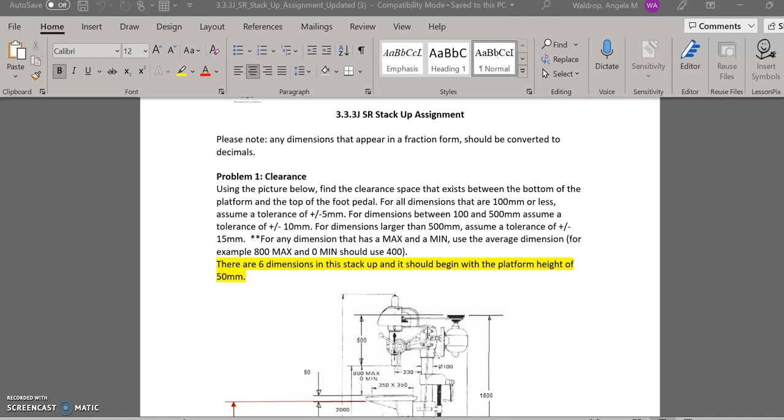Hello, today what we are going to do is we are going to talk a little bit about your stack up assignment. I'm going to try to walk you through the process that you need to follow in order to get this completed. So for the first stack up assignment, or the first part of it, you're going to be doing a clearance stack up for this picture, which is basically a drill press.

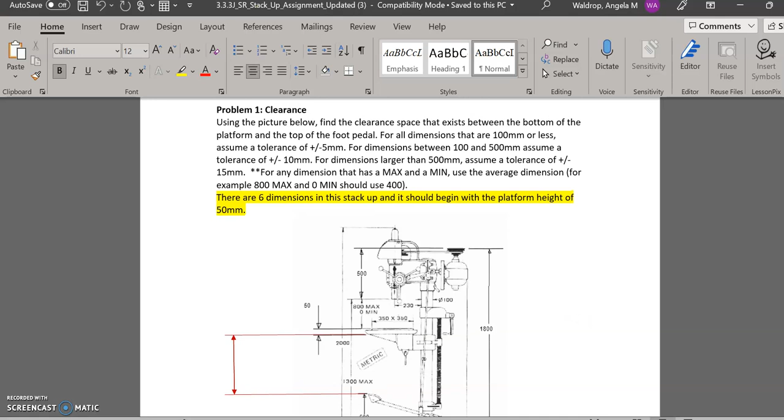And what we are looking for is the clearance space that exists between the bottom of the platform and the top of the foot pedal. And you can see that I did that in this picture with this red dimension here, okay? Now there are 6 dimensions in the stack up, and it should begin with the platform height of 50 millimeters. So basically, I'm looking for this space that's right here.

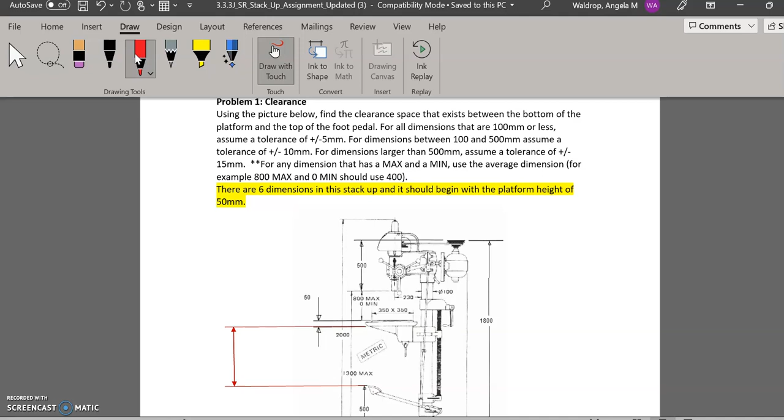I can either start up here on the line or I can start down here on that line. Now, because I've elected to start on the upper line, the first dimension that's going to appear is that 50. So what I'm going to do is I'm going to go ahead and draw my line for my orientation marker. And since I want the clearance below the line, I'm going to use a plus here and a minus there.

Okay. Now, what I like to do when I'm walking through this, and you guys remember that I've done this in class before, is I like to pretend that I'm a tiny ant and I'm walking through the dimensions to get through the components in the assembly. So I'm going to start, and I'm going to use a different color here. That way it's different from the red. I'll use the blue in this case.

So if I'm starting here at this point, and I'm going to the top of the platform, that's my first dimension. And I'm basically going to be traveling eventually back to this red line. So once I'm there at that blue line, the next dimension I see is right here, okay? So if I take a look, there's an 800 max and a 0 min. What I'm going to do is I'm going to just cut that in half and say that that's an average of 400, okay?

Now the next dimension that I have here is shown in the picture. I'm going from this point. And let me erase these other markers here. I'm going from this point here and this marker to up here in this area. And I'm just traveling through the parts. I'm erasing the marks as I go. Now I'm at this level.

I can basically go all the way down to the bottom of the part. So if I put my marker here, I can go all the way down to the bottom of the part here. Okay, that's that next step. And then I'm walking through over to this side of the part because that line goes all the way across here. And I'm eventually going to work my way up to the foot pedal.

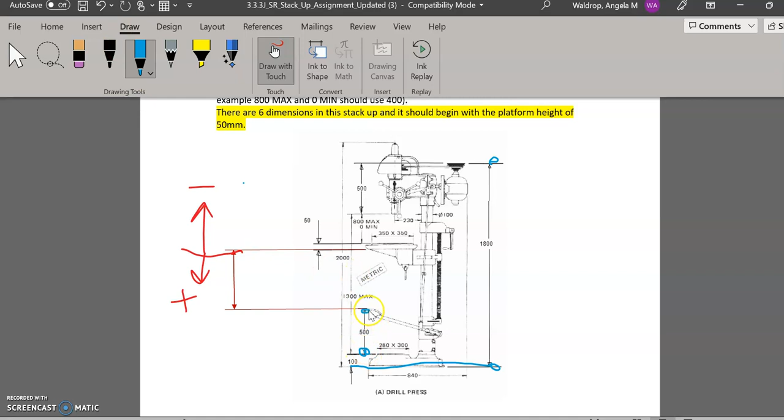So I'm going down from this blue line to this area right here. And then finally, I'm going to end up at the top of my foot pedal where I want to be. So that's the first stack up there.

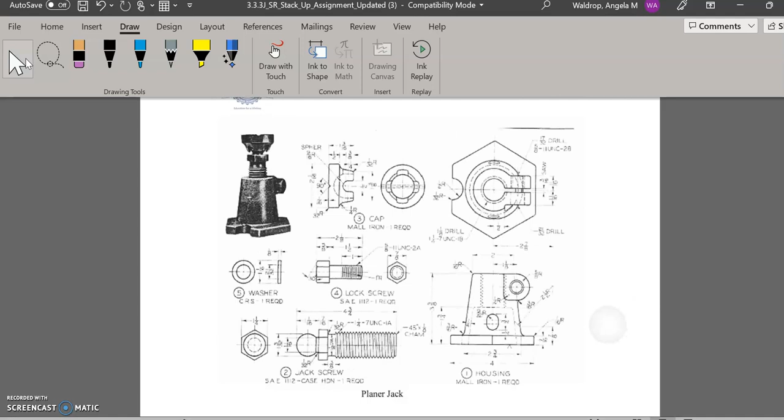Okay, so what we're going to do is we're going to scroll down to the second one. Now the second one is for the planer jack, and those dimensions are located all the way back here on the last page. There's the dimensions for the planer jack. So you'll have to flip back and forth between the picture and the dimensions here, okay? And I've given you information of what to use for tolerances.

So we're going to go back and we're just going to use a picture of the assembly. This is the hand sketch I did to see the clearances that we need. So the second clearance that we need is going to be finding the clearance between the jack screw and the table when the jack screw is fully engaged. When I say the jack screw is fully engaged, that means this screw is as far down as it could possibly go. So you can see that right here, on this level, this line right here, I've got that jack screw, it's down as far as it can go.

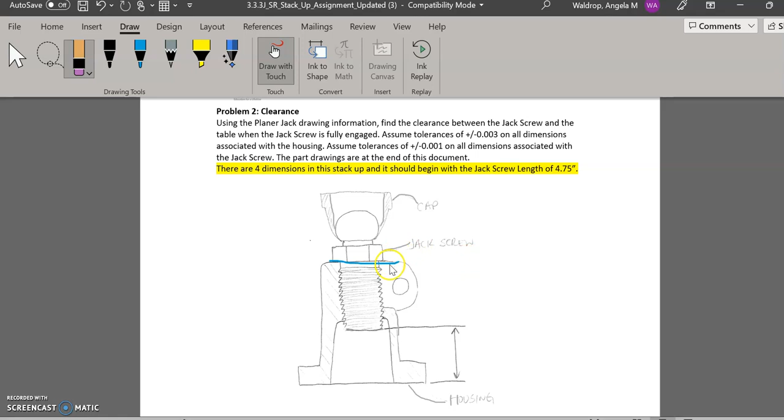So I want to see what kind of clearance I have. That way I know what size material I can put in there. Okay, so there you go. That's stack up number 2, and we're going to start that in just a second.

Okay, so since I am doing this stack up now, what I can do is I can either start at the bottom here where the table is, or I can start here. Now I'm going to go ahead and start here, and I'm going to use my red pen to put my marker here, right here on the line. And then I'm going to make sure that I put my orientation here.

And by the way, if you're having trouble with imagining the orientation, whether it's minus plus or plus minus, you can rotate the paper to the side to be able to get that. So this one arrow pointing down, I want a space here, so that's going to be positive, which means by default that one's negative.

Now if I flip back to my blue pen and go through all my dimensions, the way my dimensions are, I'm going to have to eventually get to this surface on the bottom of the housing. So I'm going to start here first, and I'm going to go the length of my jack screw. That is the first dimension in my stack up, and that's been given to you, the 4.75.

Okay. Now, once I get back to that edge of that ball there, I'm going to eventually have to work my way to this surface. So there's a few dimensions that I'm going to have to work through. I'm going to go from the edge of this ball to probably the ball edge to the hex surface, which basically means here. Okay, so that's the next dimension that I'm going to go through.

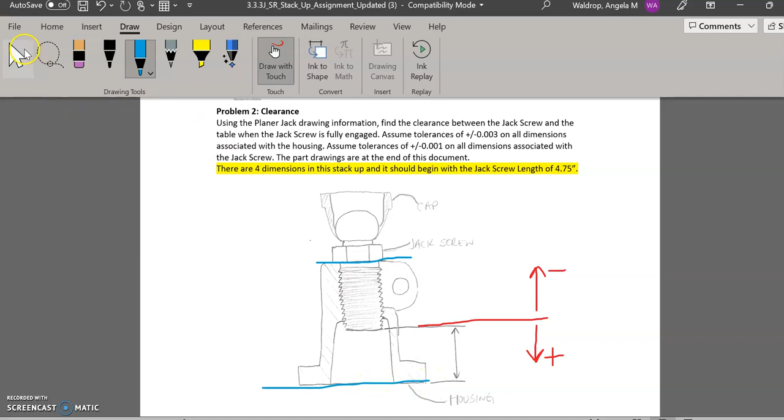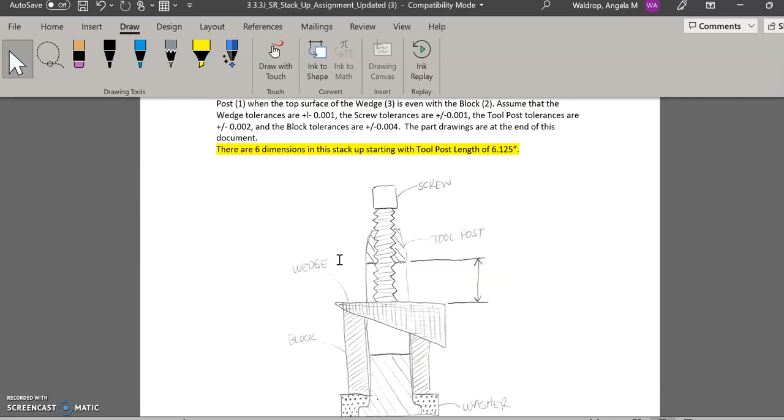Okay, now the next one is going to be an engagement stack up, and this is going to be using the tool post, and the drawings for that are on this page. So you'll have to scroll back and forth between this particular page and the assembly sketch that I've created. Okay. Now what I mean by an engagement stack up is I want to know how much the screw has engaged inside of the tool post.

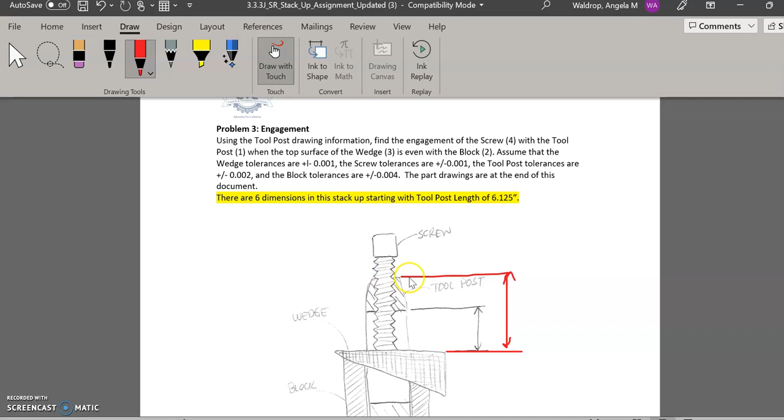So what I did is I changed my color to red, and you can see I put a dimension here. In actuality, the dimension that I want is from here to here. I want to know how much of the screw has passed through that tool post. So I'm looking for this space right here. Okay. Now, when I'm looking for my starting position, it's either going to be here or there, and I want to know how much it's engaged. So my starting position, what I've chosen is the very top of the tool post.

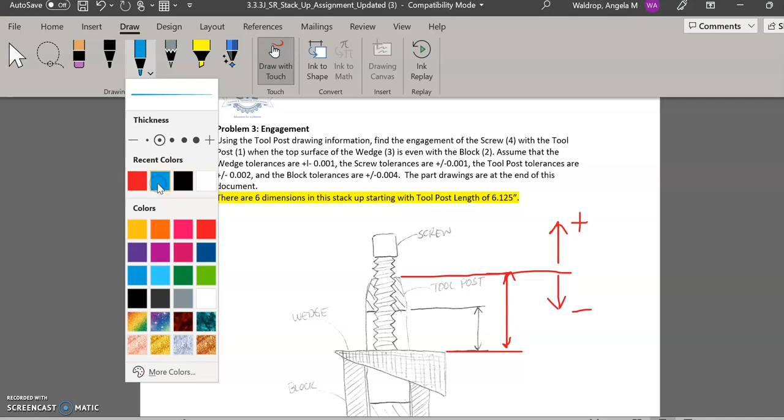So I'm going to go ahead and put my arrows, and my engagement stack ups always should be negative. So that means that this dimension here that I'm looking for is going to be a minus, which means by default this direction here is going to be a positive. Okay, so I'm going to go ahead and change my marker color to blue so we can walk through the dimensions there.

Let's get the entire picture on the screen so you can see. As I scroll through, you'll see that I'm going to be jumping around to the various parts, but you can kind of see what we're doing here. We've got 6 dimensions in the stack up. So I'm starting at this position here, and I'm going to be going all the way down to the tool post. The tool post basically ends on the table. So I'm going from this surface to this surface.

Okay, now that I'm at this surface, I'm going to erase this here. Now the washer and the tool post basically sit on the same surface, which means I can go to the thickness of the washer. And I'm doing that now here.

Okay. Now then I'm going to go to the block height. The block is going to be sitting on top of the washer. So I'll erase this bottom here. And then I'm going to go to the top of the block, which is right there. Okay. And then the next part here is I have to go to the top of the screw. So I'm going to erase this bottom line, and I'm going to travel to the top of the screw.

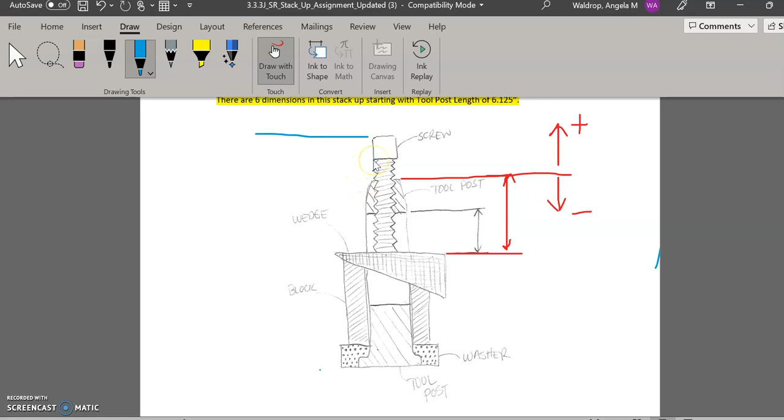Okay. Once I'm at the top of the screw, I can erase this line here. And I'm going to travel down eventually to this end here. This is where I want to go. This is where I want to end up, since that's the other end of my dimension. I may have to go through a few dimensions on the screw to be able to get to that point, but that's where I want to end up.

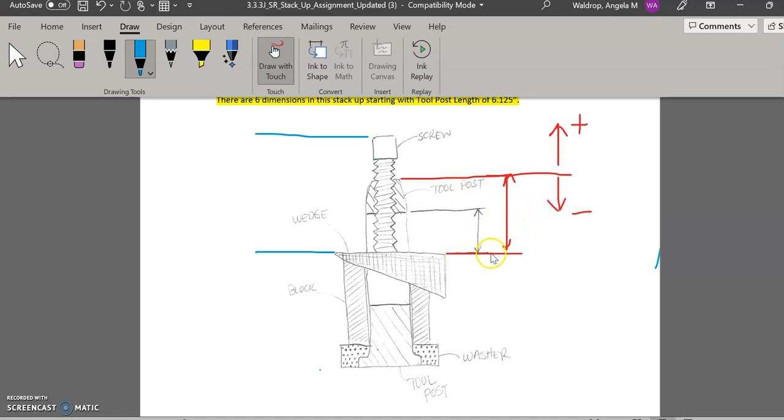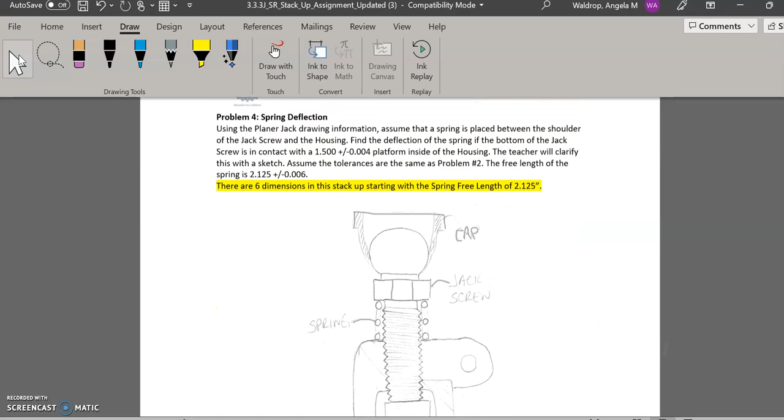So that's going to be my engagement: the distance between this line here and that line there. Okay. Moving on to my last stack up, a spring deflection stack up. Now with the spring deflection stack up, this one's a little bit special. For these spring deflection stack ups, we're going to be using the planer jack, which is on the last page.

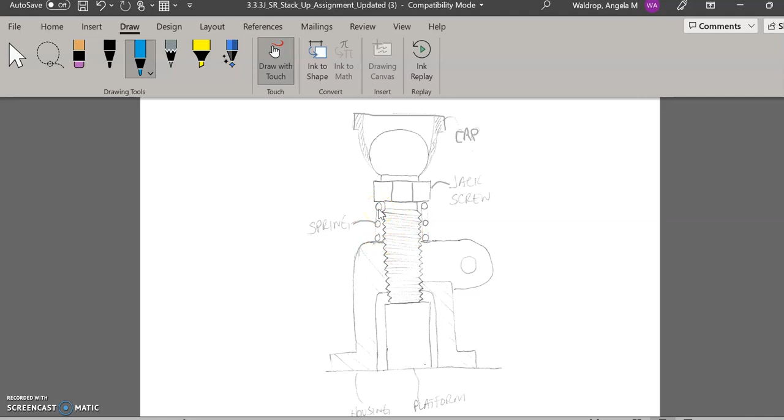Now right now, if you take a look at this picture, there's no spring in there. So we're going to have to imagine the spring is going to be there. And you can see that's where I've drawn the spring in this picture. The spring that we're looking at is right here. It's these circles. Okay, I'm cutting a cross section through the spring. The very top here is the top edge of the spring. The very bottom is the bottom edge.

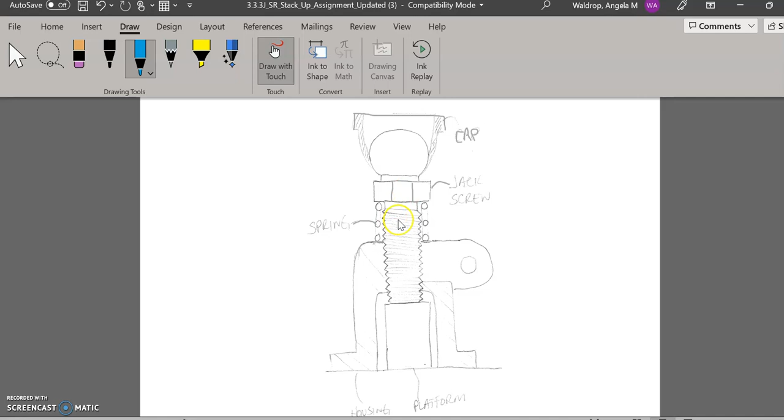Now I'm trying to figure out how much the spring deflects when I have this jack screwed down and it's touching some sort of a platform in the bottom. Okay, so that's what I'm going to do. Now, whenever I'm doing a spring deflection stack up, I'm always going to start at one of the ends of the spring. Okay, so I've chosen to start at the top end, and my first dimension in a spring stack up is always going to be the free length of the spring.

Now, since this side points to the free end of the spring, that's going to be my first dimension, and that free length of the spring is always going to be negative. So by default, this side is positive. Okay, and again, if you have trouble imagining this going side to side, you can always take a screenshot of this or rotate it on the side, and that'll help you with knowing which directions.

So my first dimension, I'll change my marker color to blue. I'm going to start here, and I'm going to go to the bottom of the spring. So that's my first dimension. Once I'm at that edge, I'm going to be going to the top of the table that the platform is sitting on. So I'm going to go to this edge. That's my second area. Okay. Once I'm finished that, I can go to the height of my platform, which is from there to there.

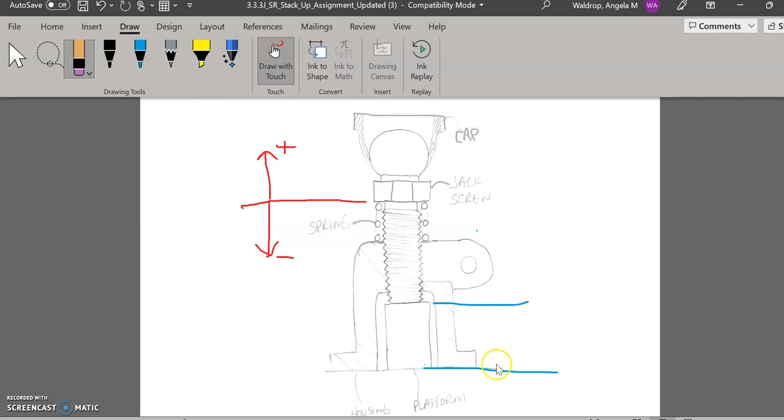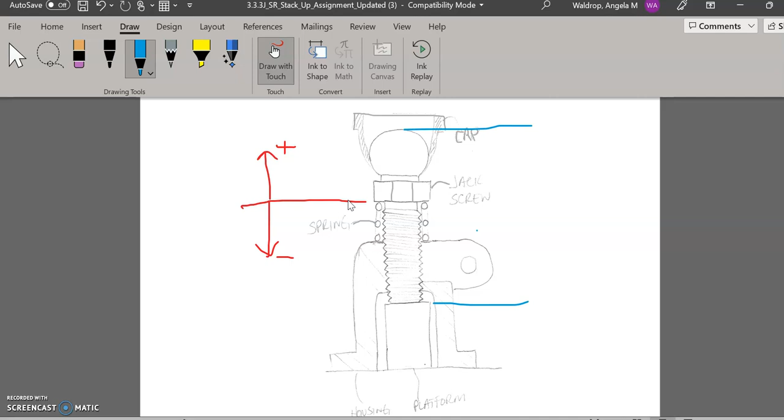Okay. And then I'm walking through again. Once I'm at that platform, I've got to go back through the jack screw. So I'm going to go the entire length of the jack screw from here to there. And remember, my goal is to get back to this original red line. And that's another special thing about spring deflection stack ups. They start and end in the same location.

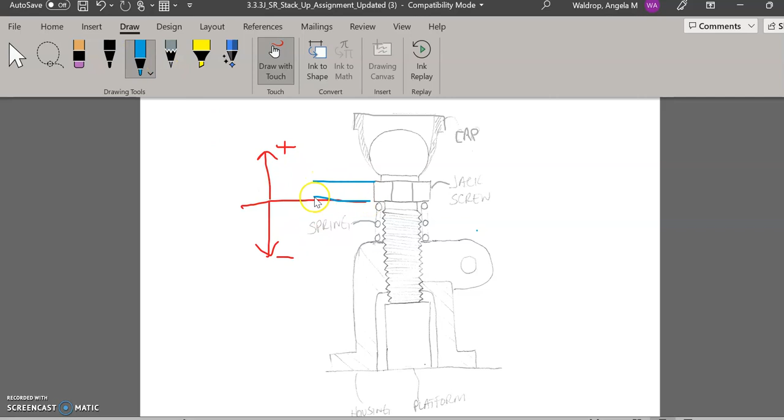Okay. And I'm going to erase this line here. And I'm going to have to go through this ball dimension to get to the shoulder of the hex. And once I do that, then I'm on my last dimension, which is the hex thickness, and then I've gone through my entire stack up. So I hope that helps you with your assignment. Please be sure to pause the video and rewind as you're working through, and that'll help you work through the dimensions.